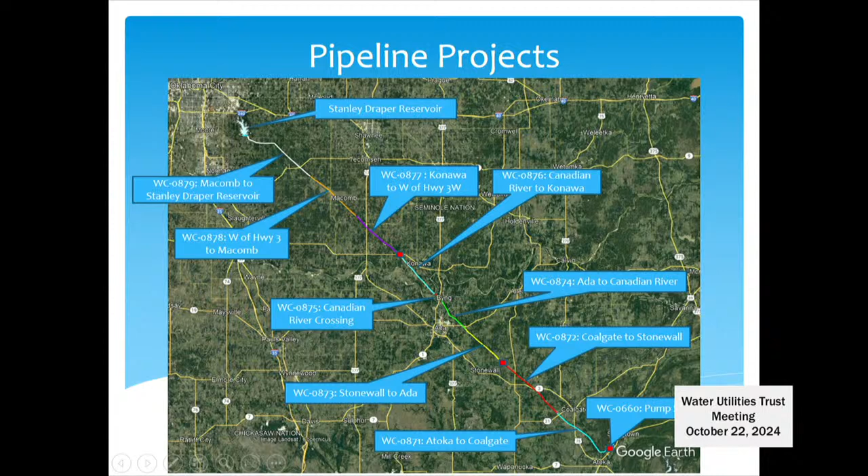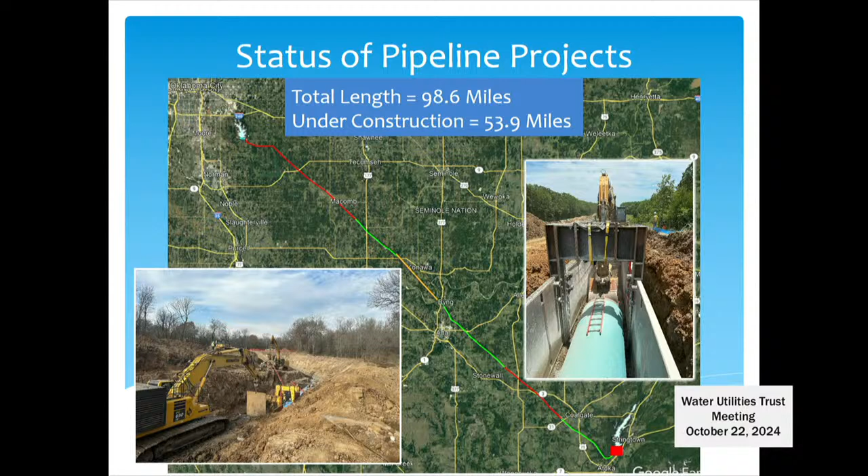Well, good afternoon, y'all. I'm here to tell you all about what's going on with the Atoka Pipeline and all of its sundry projects. As you can see, we've got lots of projects to choose from right here. Next slide. Out of 98.6 miles, I now have almost 54 miles under construction. So I'm now over half, not just about half. So let's go through them one at a time, starting from the beginning. Next slide. With Pump Station O.

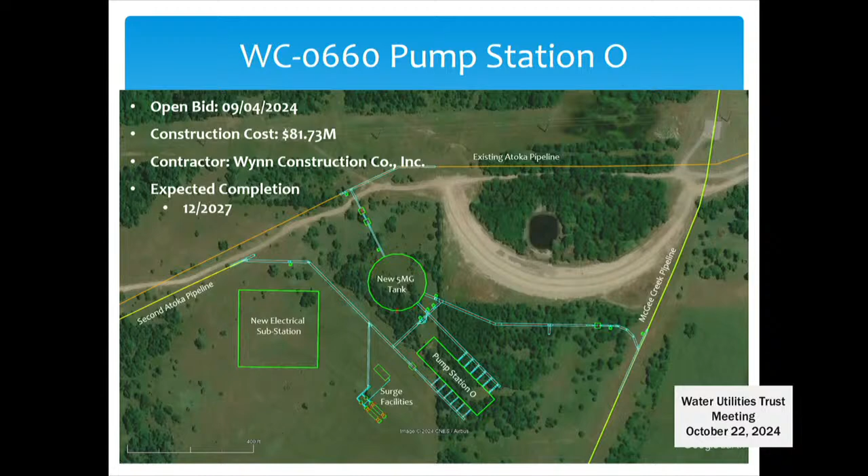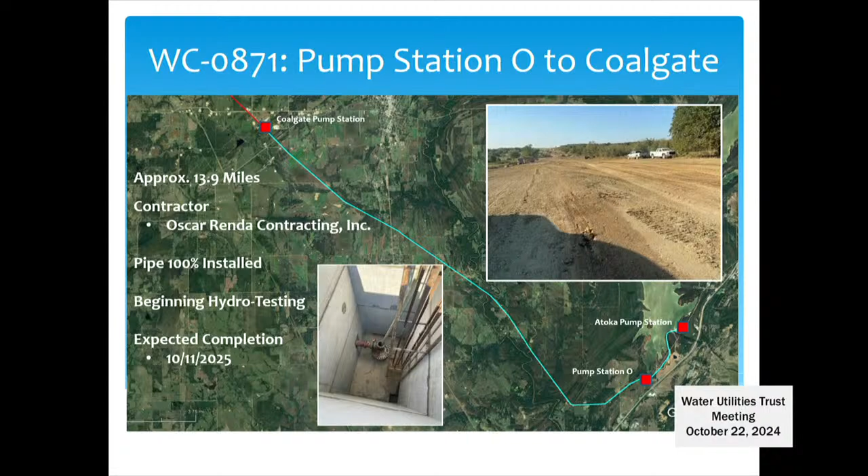We opened bid on Pump Station O in September of this year for a mere $81.7 million to Wynn Construction. We're expecting this to be completed in December of 2027. Next. WC 871, this is the pipeline segment from Pump Station O to the Coalgate Station. Oscar Renda is the contractor. The pipe is 100% installed. We have all of the pipe in the ground. They're preparing to begin the hydro testing here within the next couple of weeks. We're still on schedule to be completed in October of 2025, but I'm fairly confident we'll be a lot earlier than that. Next.

872, the one that we're advertising plans and specs for, it's about 15 miles long. The consultant was CP&Y, who's also changed their name to STV International Infrastructure. We're going to be opening bid on this in November of this year, and we expect this to be completed in June of 28. This one is kind of interesting because we have to reroute a portion of the line to go around a culturally sensitive area instead of trying to go through it in order to not have to completely mitigate the site.

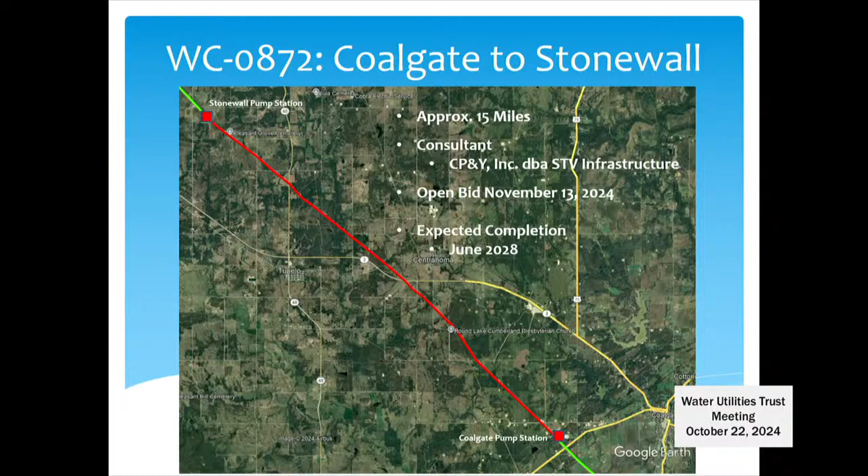Next. And all the easements are obtained? I'm sorry? All the easements are obtained? Yes, sir. We are free to go. In fact, we also have the beetle survey done for this segment, so no beetles to worry about too. Excellent.

WC 873, the segment from Stonewall to Ada, it's about 9.6 miles, and I think the rest of these projects I'm going to talk about as far as pipeline goes belongs to McKee Utilities, and they have been doing a fantastic job. On this segment here, all pipe has been delivered, and we have 88% of it installed, and we're expecting the completion in April of next year. Next.

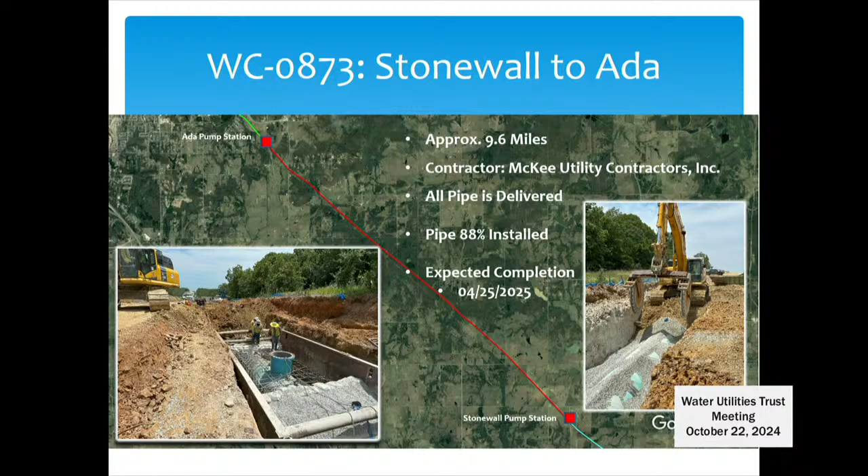874, this one is pretty much 100% installed. They're working on different air vac valves and straightening up easements and finishing up the corrosion protection. So we're almost done with that one. All we lack is finishing up.

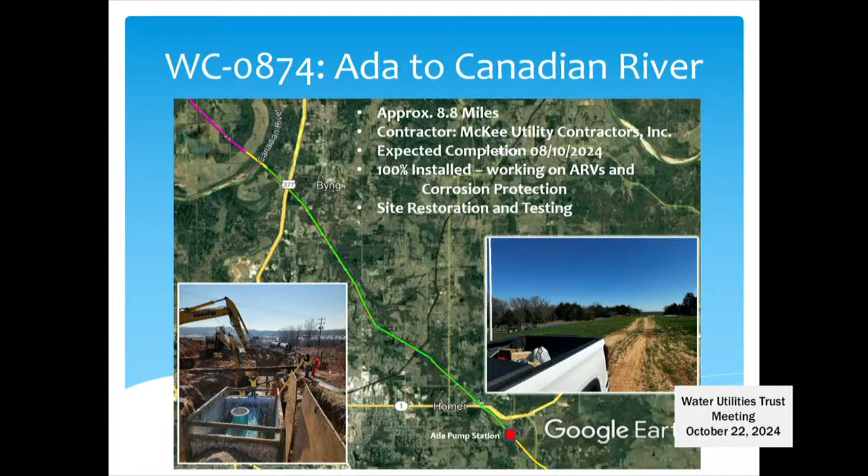Okay, next, 875. Really no news here. I should take it off the list, but it's sequentially correct. So we're 100% done with this. The new 60-inch main is in service. The aerial portion of it, we're working on an amendment to the engineering contract to remove it from the river.

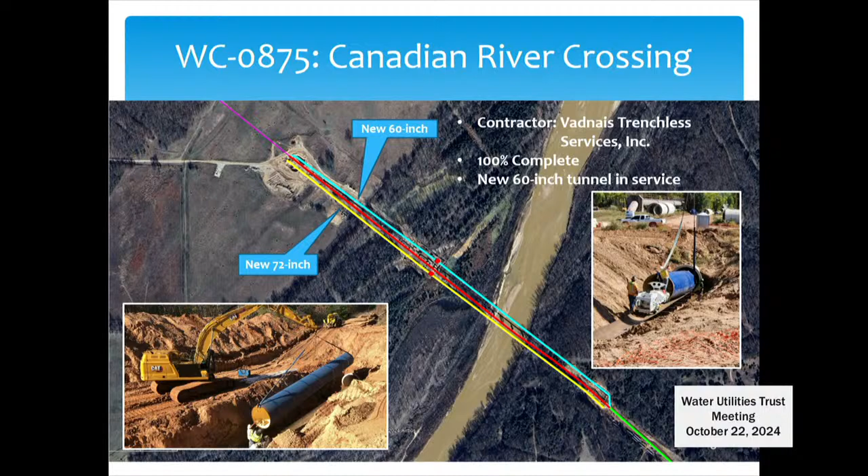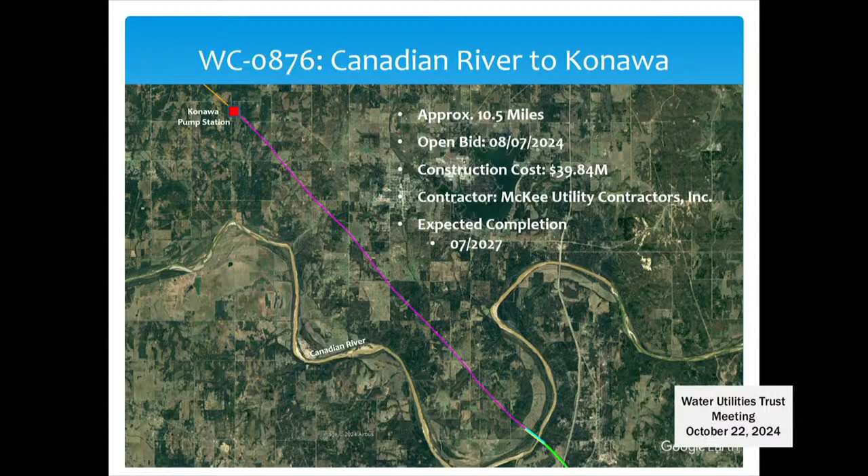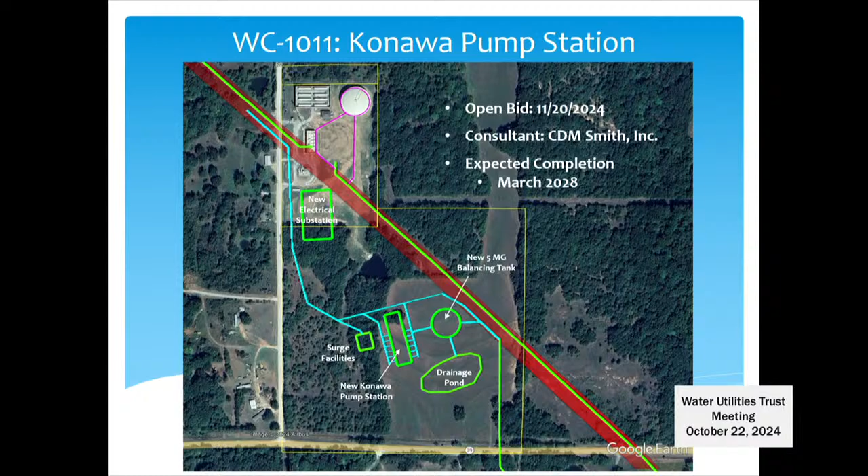Next, 876. We recently opened bid for this one in August of this year. It's about 10.5 miles. We expect this one to be done in July of 2027. Going up to the Konawa Pump Station, which is next, and that too is something that we are advertising plans and specs for. I want to point out a few things on this one here: we have plenty of room on this segment to build a new pump station as well as reserve land for a third pump station in case we ever decide to put a third pipeline in. Next.

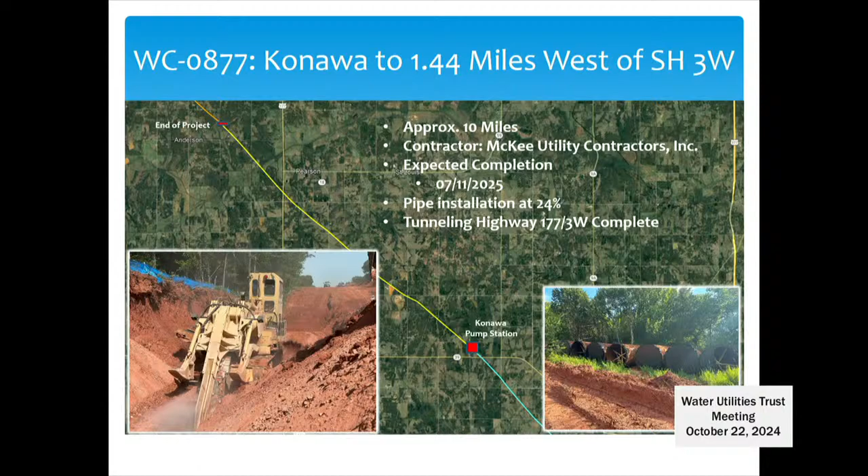Konawa to just west of State Highway 3. That's about 10 miles, and we're looking to have that complete in July of 2025. Right now, we have 24% of the pipe installed, and the tunneling across Highway 177 has been completed. Next. And I've only got a few left to get into the ground or built up.

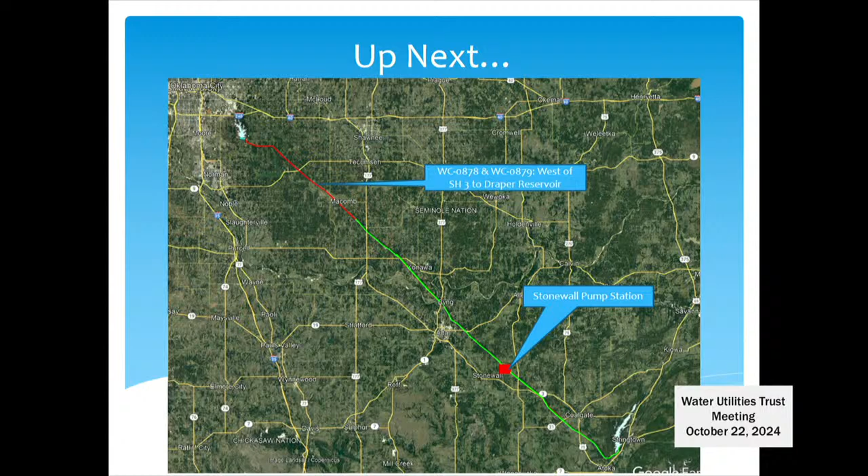One is the Stonewall Pump Station that we're going to have lined up to start advertising, I think, in January or February of next year. And the other last two segments coming from west of Highway 3 to Draper Lake. Good heavens. Next, and I'll take any questions you might have.

Any questions, Mr. Hare? Will we have the option of taking the water directly from the pipeline into the plant? Do we have an option to do that? Yeah. There currently is one. It's a 60-inch going from the outlet box on the southeast corner of Draper going all the way to the treatment plant. The next new segment will also have that same capability. We have to rebuild that box anyway because it's too small for the amount of water to go through it. So we're going to put in a Y segment and then go straight to the box or veer off to the plant. All right. Thank you.

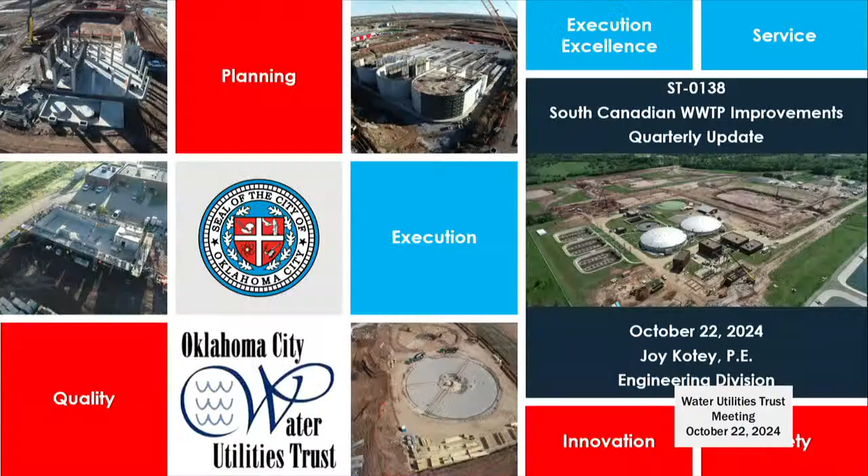Oh, it works. Awesome. Okay.

Our current construction status: we're about 53% of the way through the contract duration, and we have paid just over $103 million to date, so we are ranging around 55% complete in dollars. We still are holding our two milestone dates: phase 1, substantial completion with commissioning through the secondary treatment process, for February 2026, and final completion, which includes demolition of our existing equipment such as the SBRs, for February 2027.

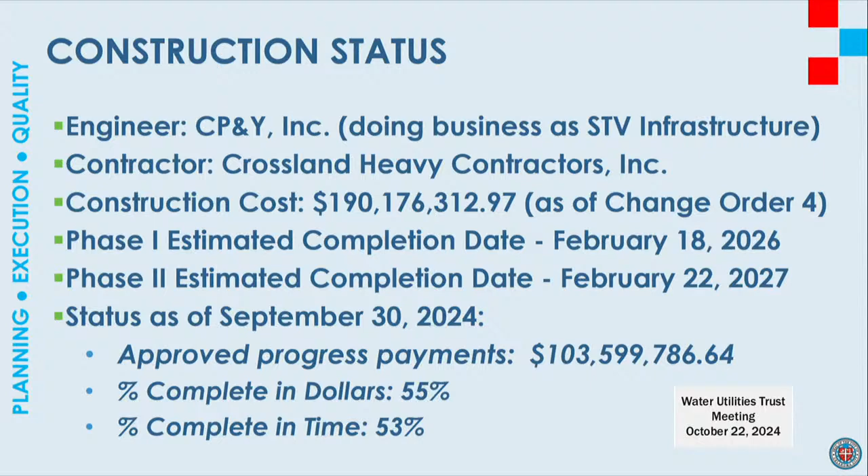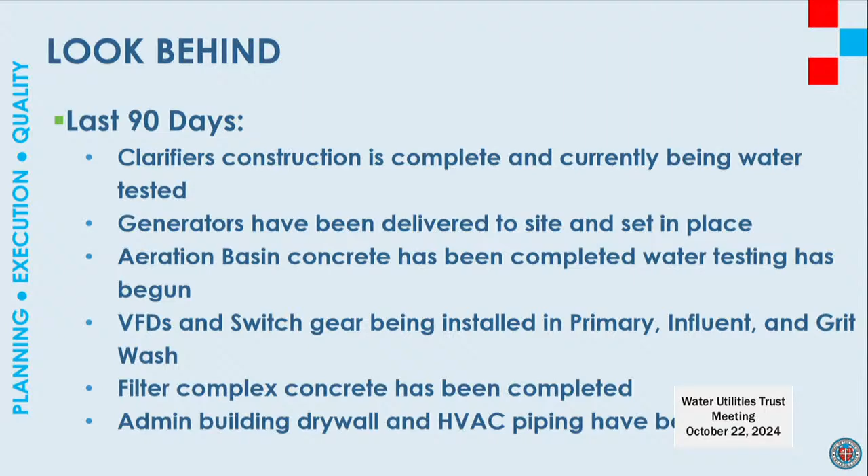In the past 90 days, we've completed the clarifiers, precast concrete structures by the DN tanks, which are currently being water tested. Our generators for the primary electrical area have been delivered on site and set in place. Our aeration basin structural concrete has been finished — that's our largest concrete structure on the project — and we've started water testing for that as well. Our variable frequency drives and switchgear are being installed in some of our major electrical areas. Our filter complex concrete has been completed right after the clarifiers, and we've started internal work on our new administration building with drywall and HVAC piping.

Looking ahead to next quarter, we'll be completing the chlorine contact and effluent pump station structures, constructing the OG&E meter vault and the modulating valve vault, and completing the roofing for all of our newly completed structures, some of which you'll see in progress in the following photos. We'll begin water testing on additional structures north of the aeration basins at the grit and filter vortex areas, continue backfilling around the completed clarifiers, and work on getting power to the administration building.

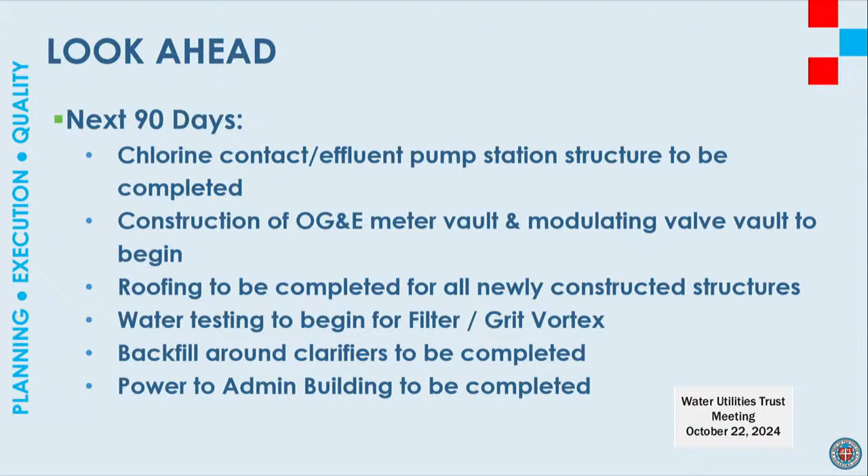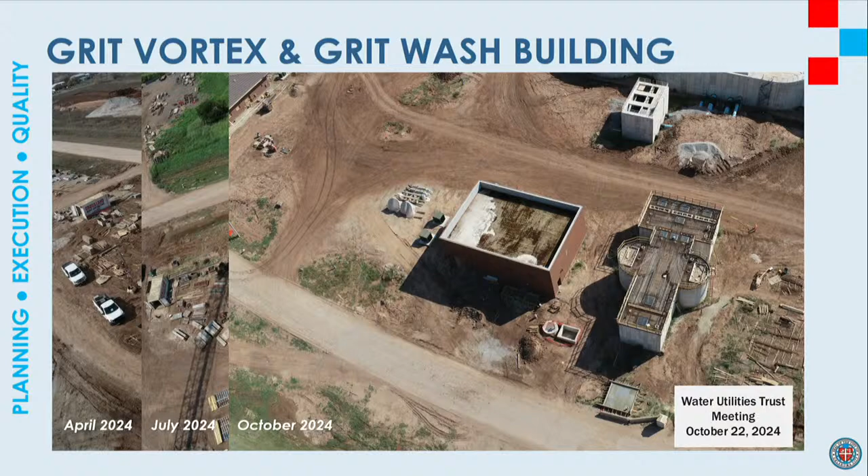A couple of photos here of some of our major project areas. Currently, our grit vortex and grit wash buildings — you can see our TPO roofing system in place, so we've made great progress. And of course our extended aeration basins, our carousels, the showstopper of the project, now has algae-filled water in it for water testing, which is great.

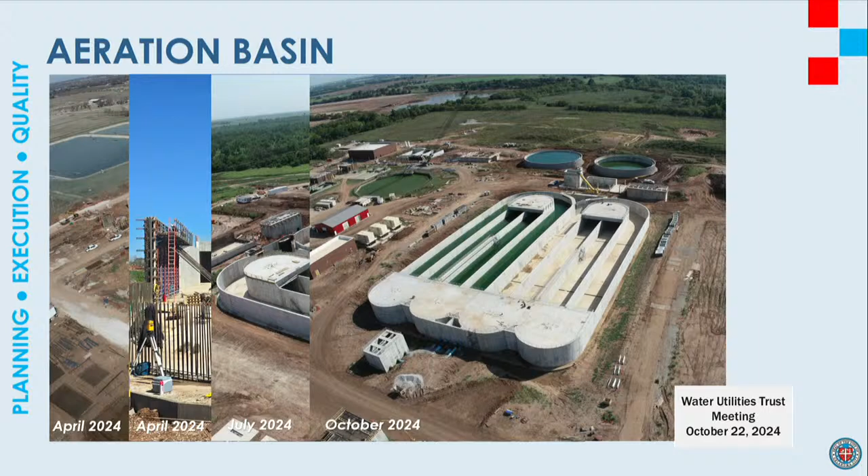Also wanted to add this area just south of our aeration basin, ahead of our clarifiers. We have a splitter structure for splitting flow to our different clarifiers, as well as our recycle pump station, and those are in progress as well.

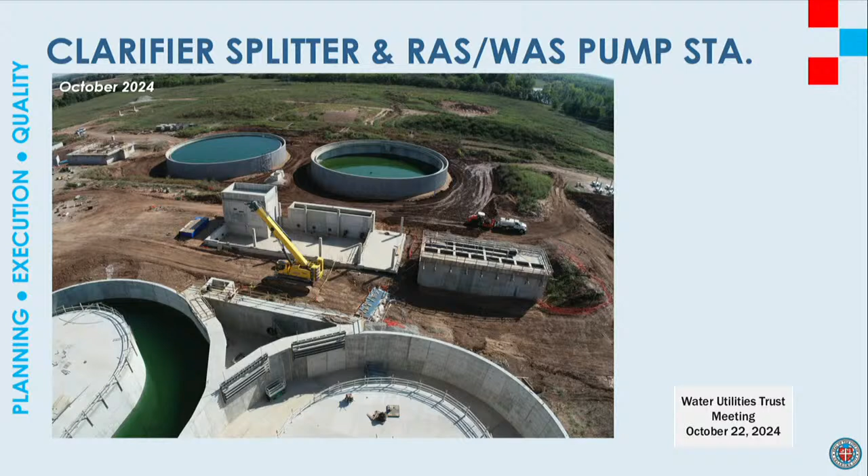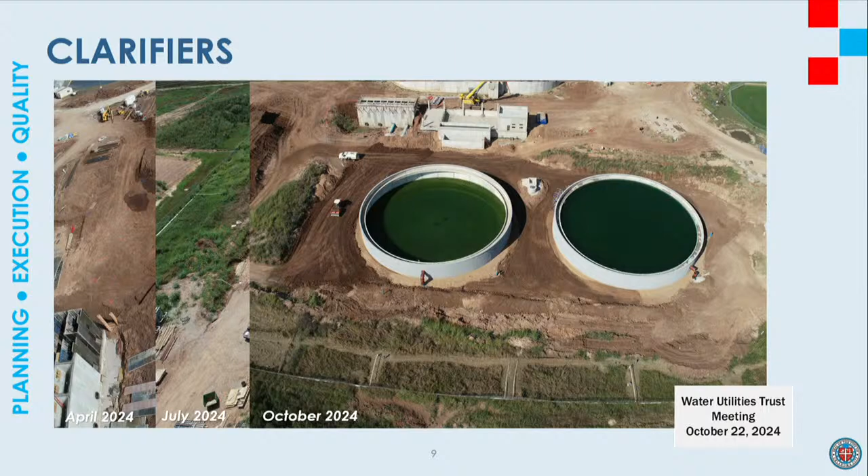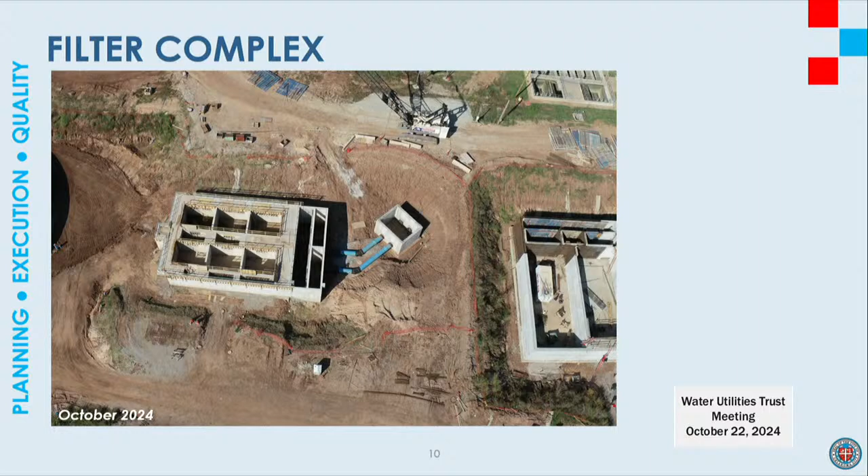Here are the clarifiers completed with algae-filled water in them for water testing, which is great. You can still see the areas around that need to be backfilled. Our new filter complex has come quite a long way in the past few months as well.

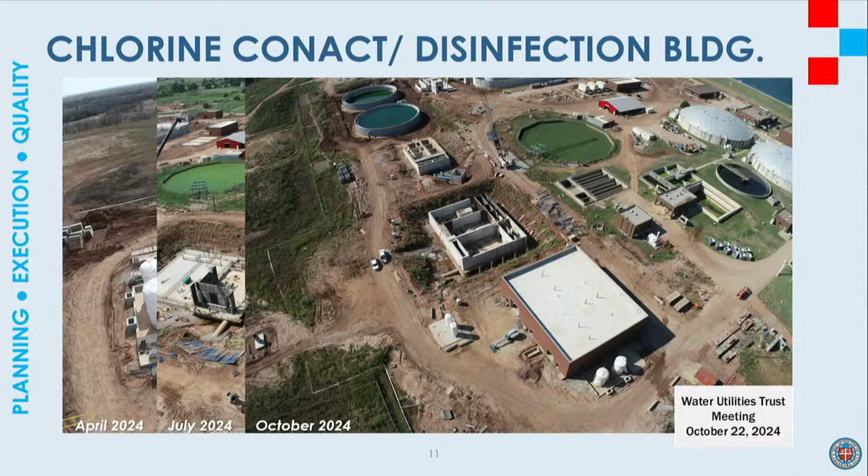We've also made significant progress on our chlorine contact and disinfection buildings. You can see our roofing system in place over the disinfection building, as well as some of the exterior masonry. And our primary electrical, as I said earlier, now has generators situated in place, which you can see in this last photo.

With that, I will attempt to answer any questions you have, and we have some nice drone footage provided by our contractor, Crossland Heavy. Probably should have put this on a slide before questions, but it's totally fine.

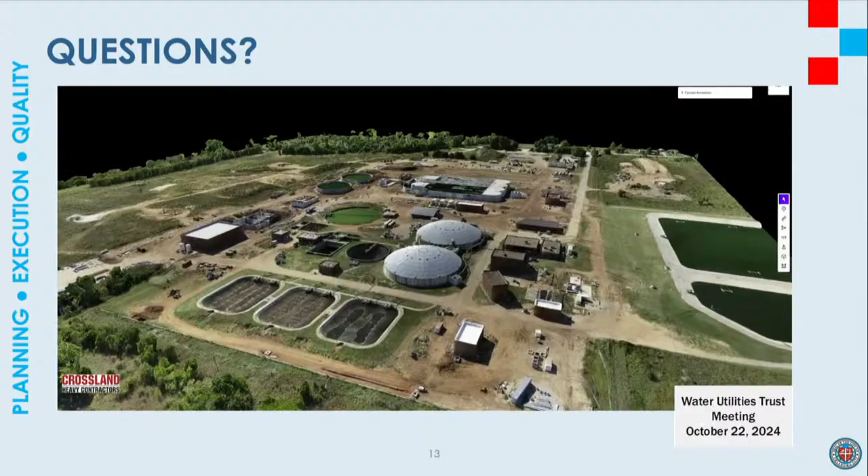Very nice. Any questions of Joy? Thank you. Thank you so much. Appreciate it. That's great.